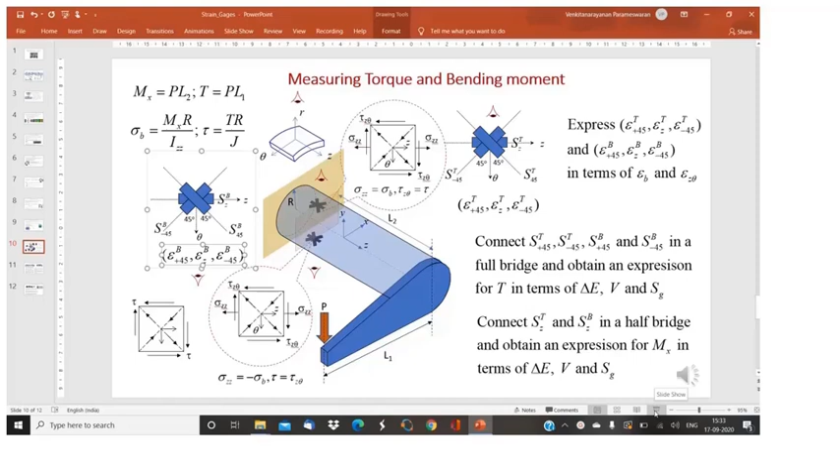I will explain to you how to measure torque and bending moment directly using a pair of strain rosettes and by connecting the gauges in the rosette appropriately in a full bridge or half bridge.

So I'm showing here a cylindrical rod of radius r. One end of the rod is fixed. At the other end there is a handle using which you can apply force P as shown here. P is applied at a distance L1 from the axis of the cylindrical rod.

Now if you consider a section as shown here, which is at a distance L2 from the plane in which this load P is applied, you will have a bending moment Mx equal to PL2 acting at this section, and also a torque which is equal to PL1 acting at the same section. Due to this, you will have a bending stress and a shear stress due to the torque.

Now if you consider only torque and take an element from the surface of the rod, then you will see that the element has only shear stresses as shown in this figure here, which gives you the state of stress at that point on the surface. Now when you have only shear stress like this, it is a state of pure shear as shown here.

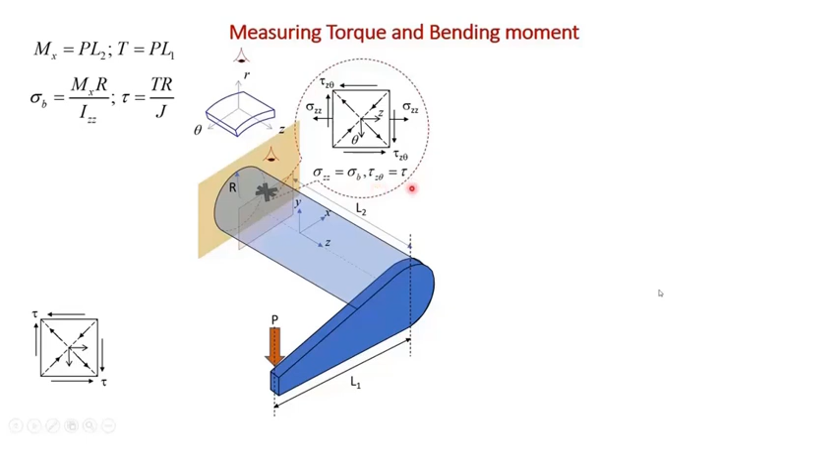You have sigma zz and tau z theta as shown here. Sigma zz will be equal to the bending stress sigma b, and tau z theta will be equal to the shear stress due to the torque. Please note the bending stress will be positive for this rosette. So if you look at the rosette, you have one gauge along the z axis and two gauges making plus minus 45 degrees to the theta axis as shown here.

Now I would like you to think about the strain measured by SZ, this strain gauge which is aligned along the z axis, and also about the strain in the plus minus 45 degree directions. The normal strain along these plus minus 45 degree directions will have one part from the shear stress and another due to the bending stress.

Now we will place a second rosette diametrically opposite to the first one on the bottom surface and view from the bottom. Then if you take an element at this point, you will see a similar state of stress as shown here, with the only difference that the bending stress now will be negative at the bottom. A strain rosette again has one gauge along the z axis and two gauges at plus minus 45 degrees to the theta axis.

With this information, I want you to express the strains in plus minus 45 degree direction on the top rosette and the bottom rosette, and the strain along the Z direction on the top and bottom rosette in terms of epsilon B and epsilon Z theta. Once you do this, you have to connect the plus minus 45 degree gauges in a full bridge configuration such that the output is proportional only to the torque.

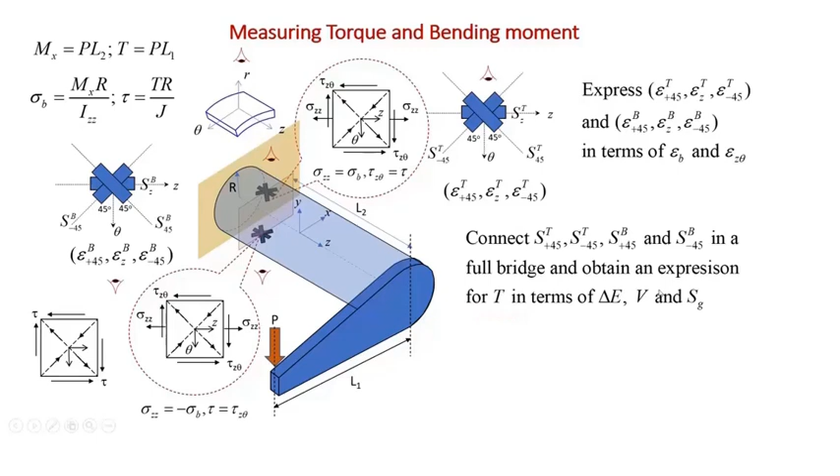Connect the two gauges aligned along the Z axis, top and bottom, in a half bridge configuration and obtain an expression for the bending moment in terms of delta E, V and Sg. In this case, the output of the bridge should depend only on the bending moment and the effect of torque will be eliminated.

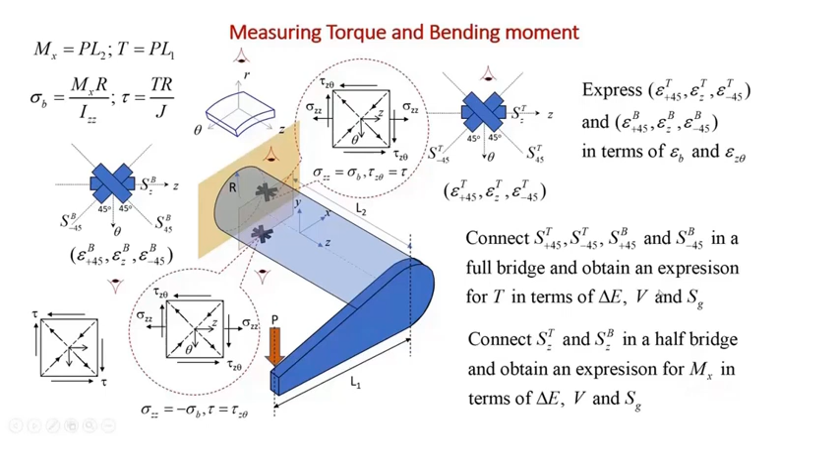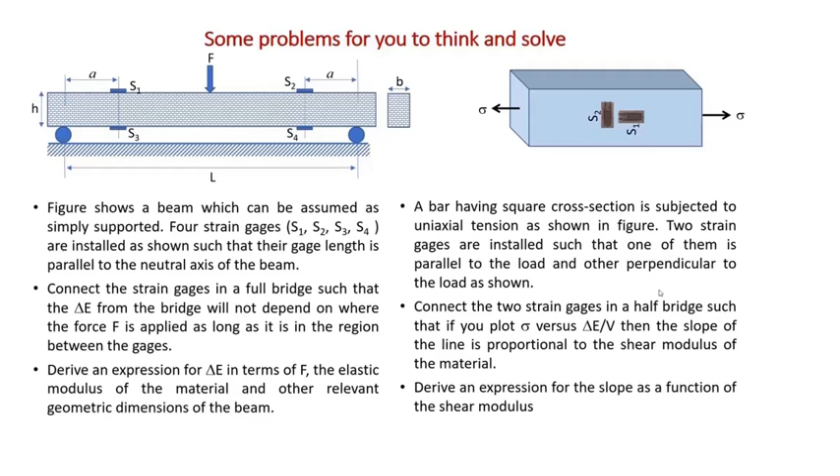Derive an expression for the slope as a function of the shear modulus, so from the slope of sigma versus delta E by V, you can measure the shear modulus directly.

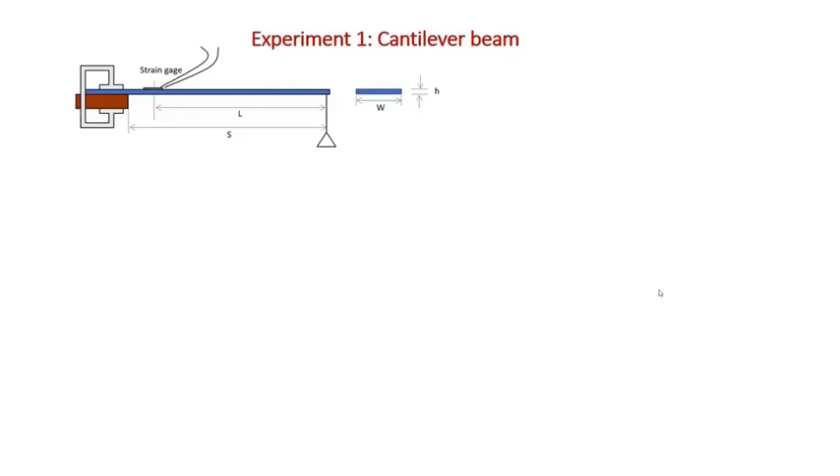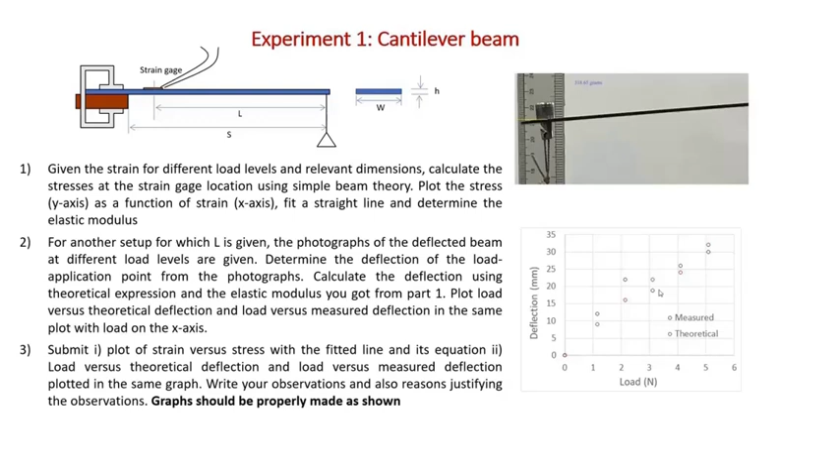Once you do the experiment, you will get strain readings as a function of force. We will provide you with that data, and you get to do certain calculations, follow the steps given here, generate some graphs and submit a report. Detailed instructions on what you have to do and what you have to submit in the project report will be sent to you along with the data soon.